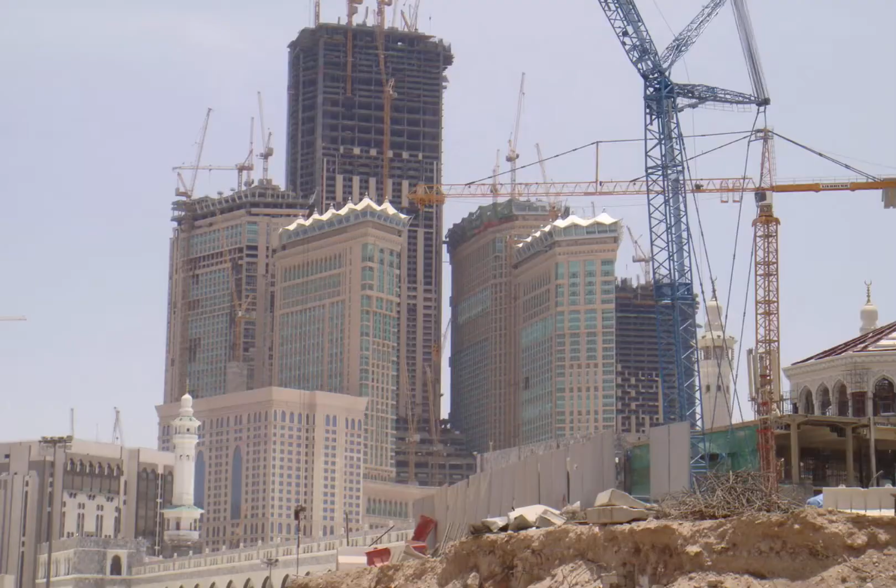Mecca is a place found in Saudi Arabia, known around the world for Muslims. In Mecca, there is Masjid Al-Haram, which is very sacred for Muslims around the world. The Masjid Al-Haram Mosque is also a major attraction for the more than 6 million pilgrims who visit Mecca each year. The Saudi Arabian government has implemented a mega project, the largest expansion project of the Masjid Al-Haram in Mecca.

One of the mega projects is the construction of the Abraj Al-Bait Clock Tower. The building is adjacent to the Kaaba in Masjid Al-Haram. The Abraj Al-Bait Clock Tower is the tallest building in the Middle East and Saudi Arabia, as well as the third tallest building in the world. It was developed at an estimated cost of $15 billion, making it one of the most expensive buildings in the world.

Abraj Al-Bait Tower is included among the 10 tallest tower buildings in the world. It surpasses the height of many towers worldwide and has been listed as the 10th tallest tower building globally. Abraj Al-Bait is the third tallest building in the world, having surpassed the height of Taipei 101, but it still cannot surpass the height of the Burj Khalifa Tower, which is the tallest building in the world.

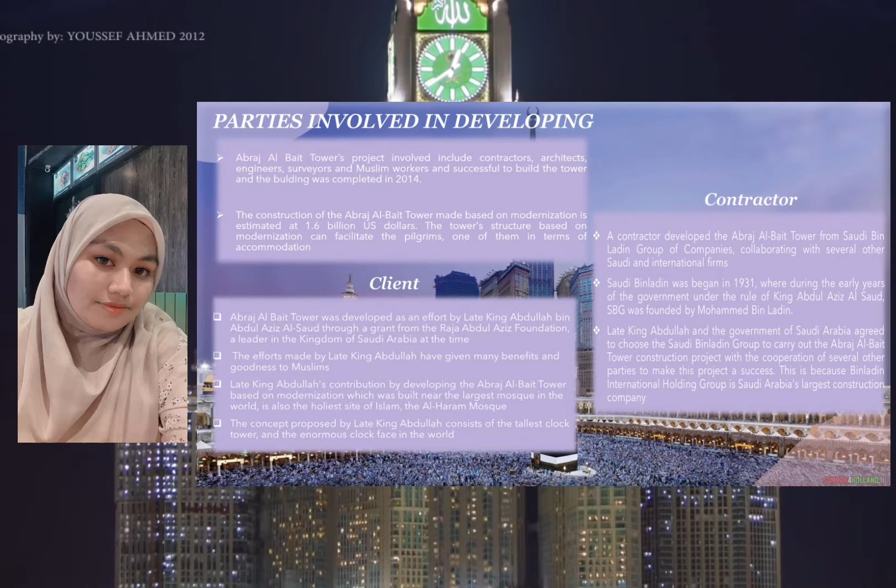Today I will talk about the parties involved in developing Abraj Al-Bait Tower. The project involved contractors, architects, engineers, surveyors and Muslim workers, who successfully built the tower. The building was completed in 2014.

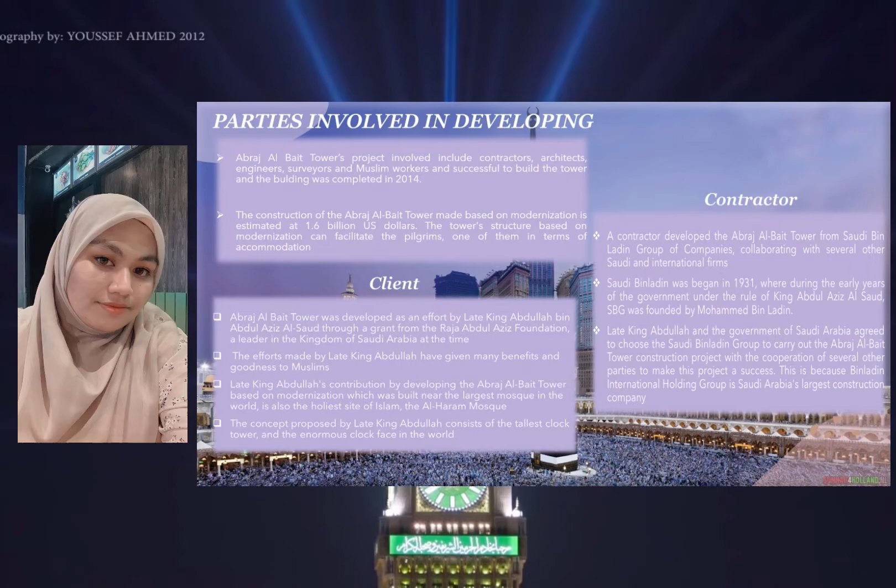The construction of the Abraj Al-Bait Tower, made based on modernization, is estimated at 1.6 billion US dollars. The tower's structure, based on modernization, can facilitate the pilgrims, one example being in terms of accommodation.

Firstly, the party involved in developing it is the client. Abraj Al-Bait Tower was developed as an effort by the late King Abdullah bin Abdul Aziz Al Saud through a grant from the Raja Abdul Aziz Foundation, a leader in the Kingdom of Saudi Arabia at the time. The effort made by King Abdullah has given many benefits and goodness to Muslims.

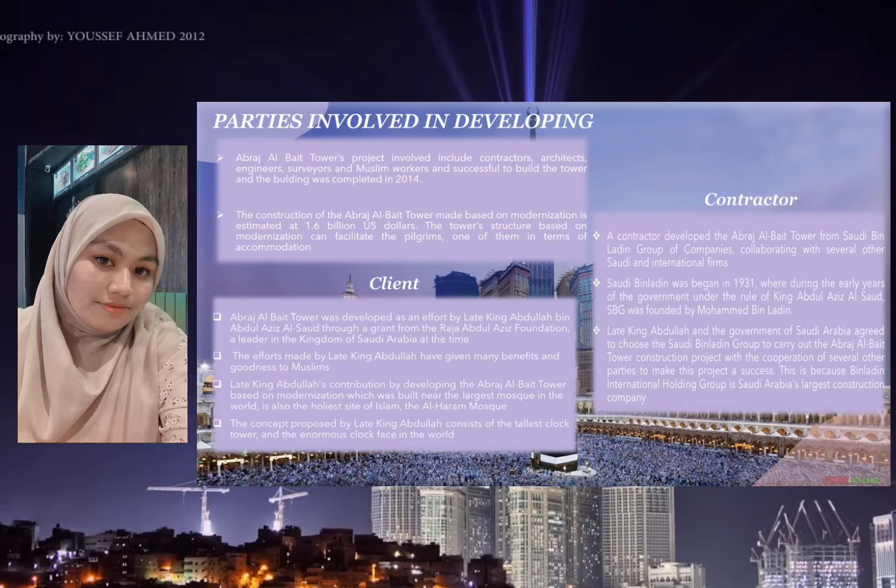The late King Abdullah's contribution by developing the Abraj Al-Bait Tower based on modernization, built near the largest mosque in the world, which is also the holy site of Islam, the Al-Haram Mosque. The concept proposed by the late King Abdullah consists of the tallest clock tower and the enormous clock face in the world.

Secondly, the contractor. The Abraj Al-Bait Tower was developed by the Saudi Bin Ladin Group of companies, collaborating with several other Saudi and international firms. Saudi Binladin Group began in 1931, during the early years of the government under the rule of King Abdul Aziz Al Saud, and was founded by Mohammed Bin Ladin.

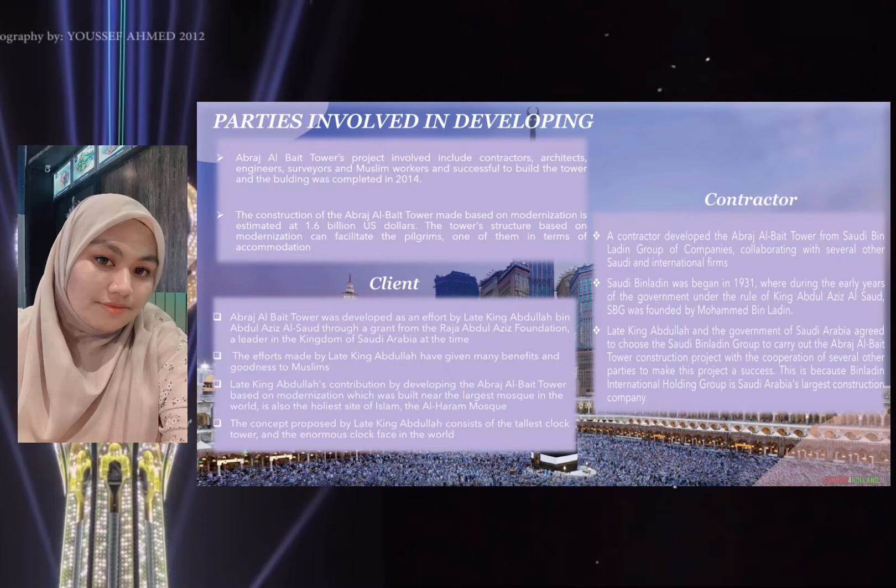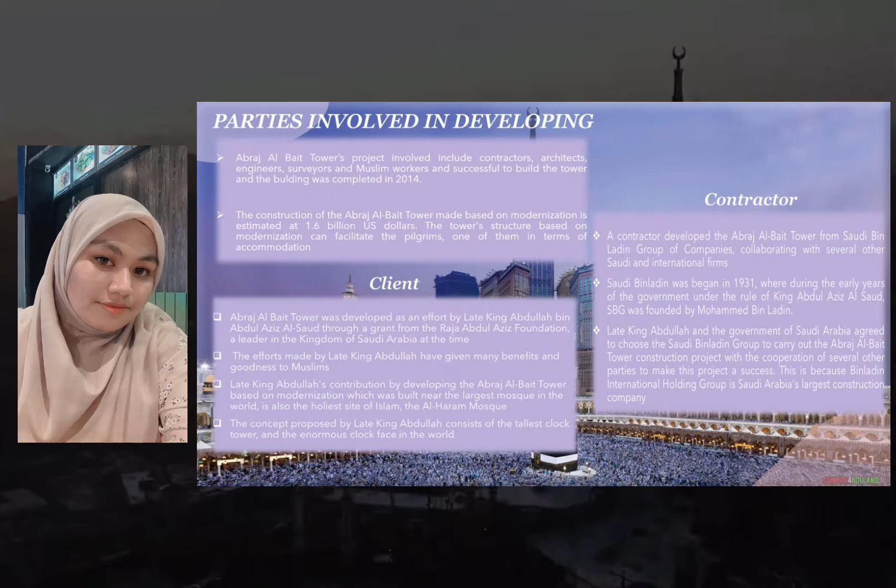The late King Abdullah and the government of Saudi Arabia agreed to choose the Saudi Binladin Group to carry out the Abraj Al-Bait Tower construction project, with the cooperation of several other parties to make this project a success. This is because Binladin International Holding Group is Saudi Arabia's largest construction company.

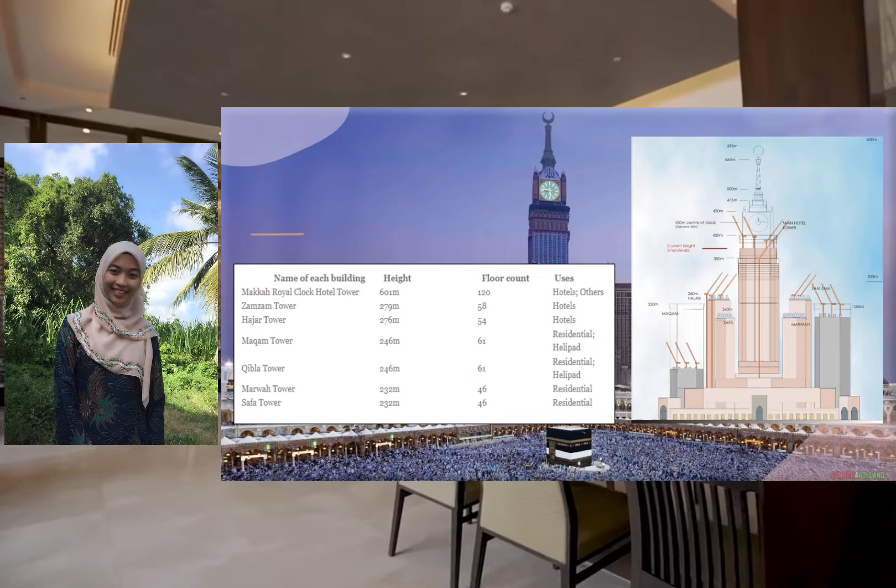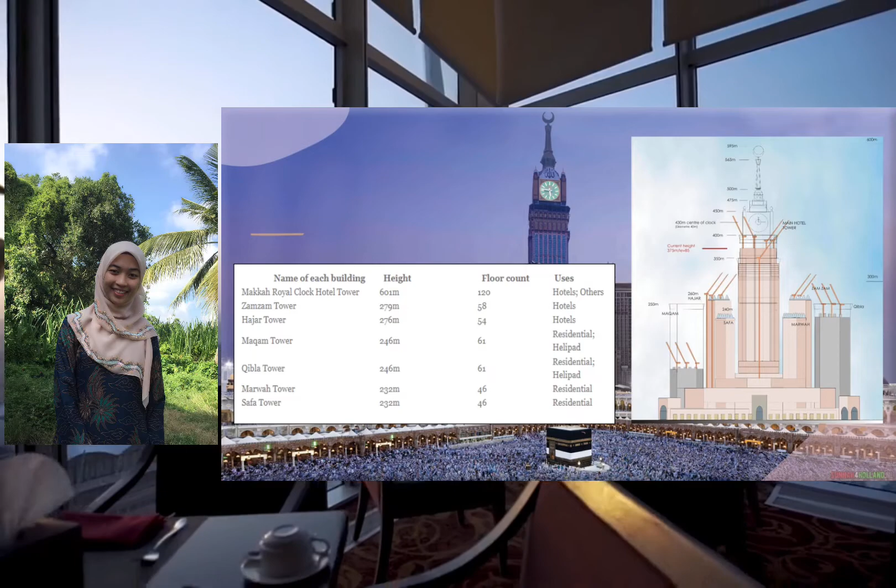Abraj Al-Bait Tower's location is also special, being just 50 meters away from Islam's holy site, the Kaabah. It is surrounded by Masjid Al-Haram, the largest mosque in the world. The 601-meter height of the Abraj Al-Bait clock tower structure makes it a unique building.

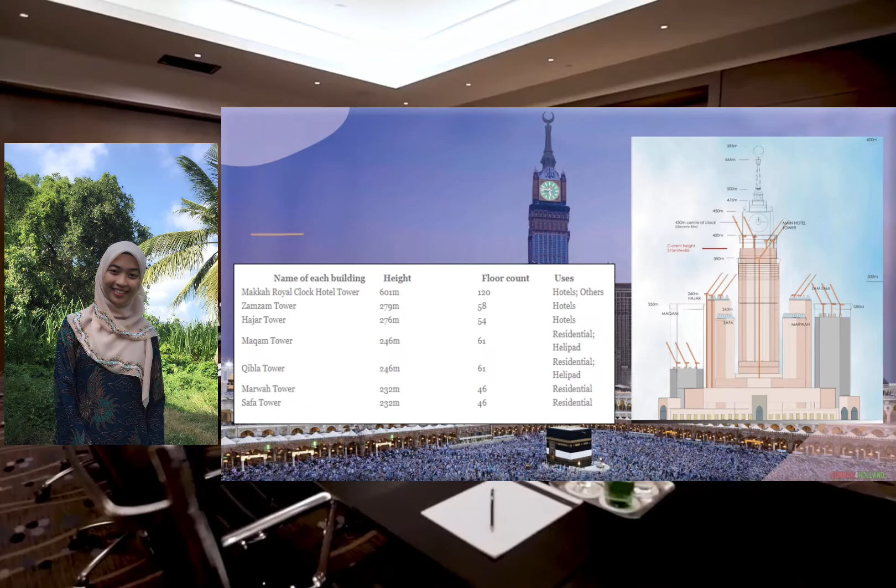It is the third tallest building in the world after the Burj Khalifa and the Shanghai Tower. The Mecca Clock Tower is the city's new landmark due to its unique location and substantial height.

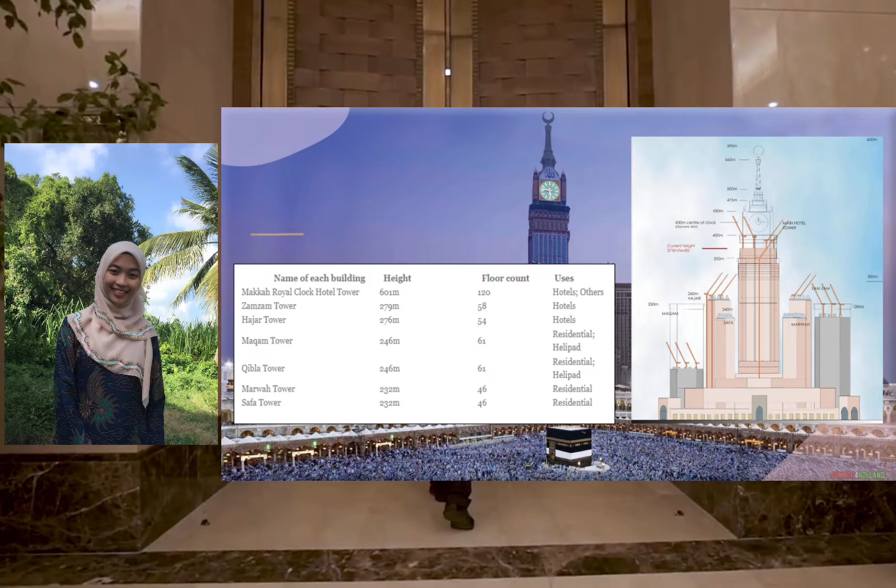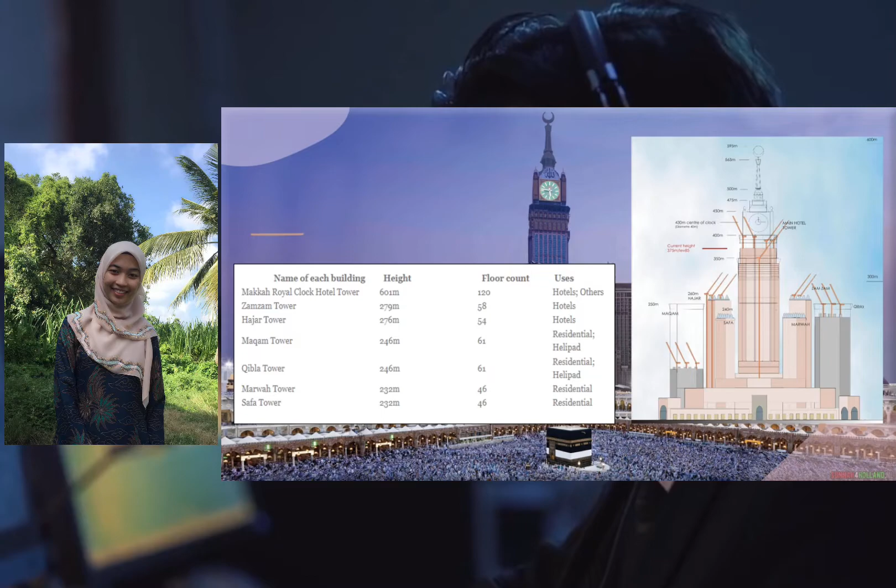The building complex in front of Masjid Al-Haram in Mecca consists of 7 buildings named Hajar, Zamzam, Maqam, Qibla, Marwah, Safa, and also Abraj Al-Bait. The Abraj Al-Bait complex has approximately 16 million square feet of floor space.

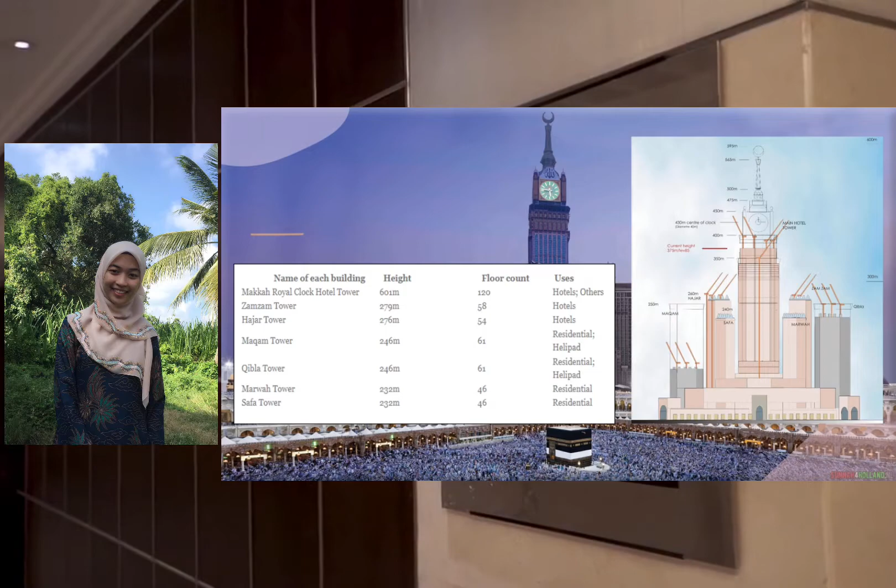The capacity of Abraj Al-Bait is 65,000 to 100,000 people. It was designed by Dar Al-Handasah, an architectural firm from Lebanon. The building complex is designed in a typical Islamic style.

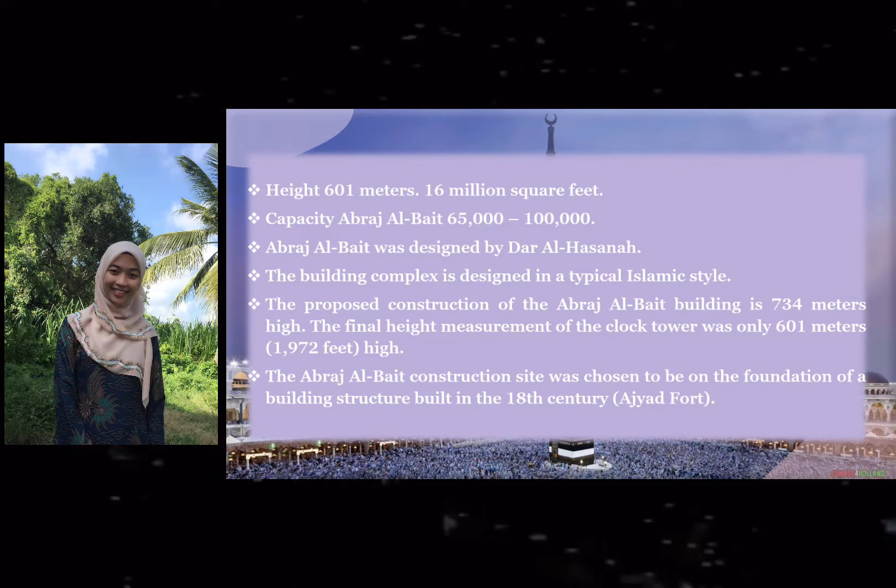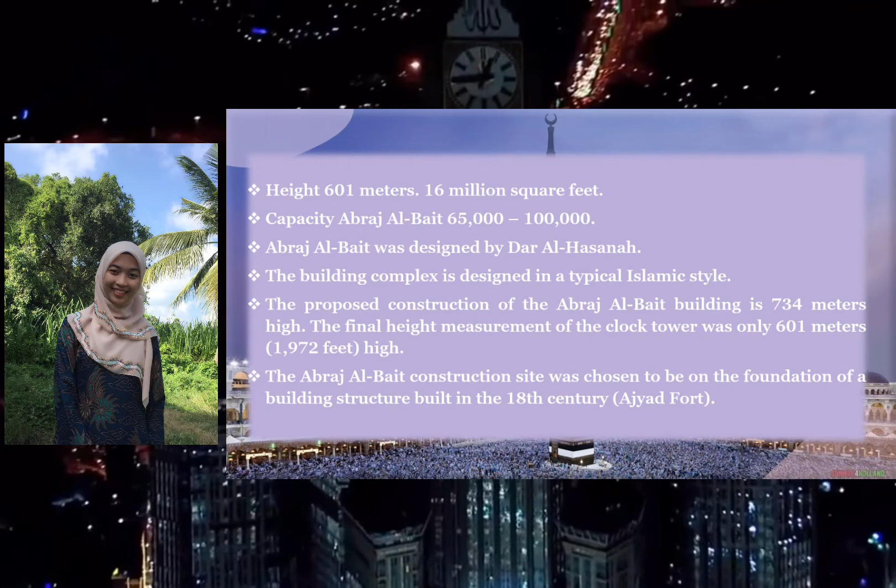Based on the initial construction proposal, the Abraj Al-Bait building was proposed to be 734 meters high. However, after re-inspection in the planning and implementation phase, the final measurement of the clock tower was only 601 meters, reduced by 133 meters from the initial proposal.

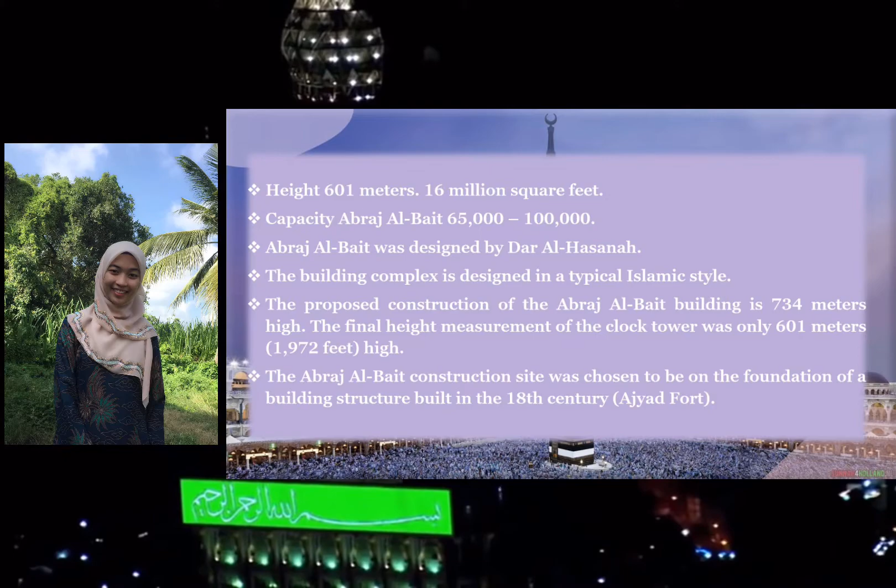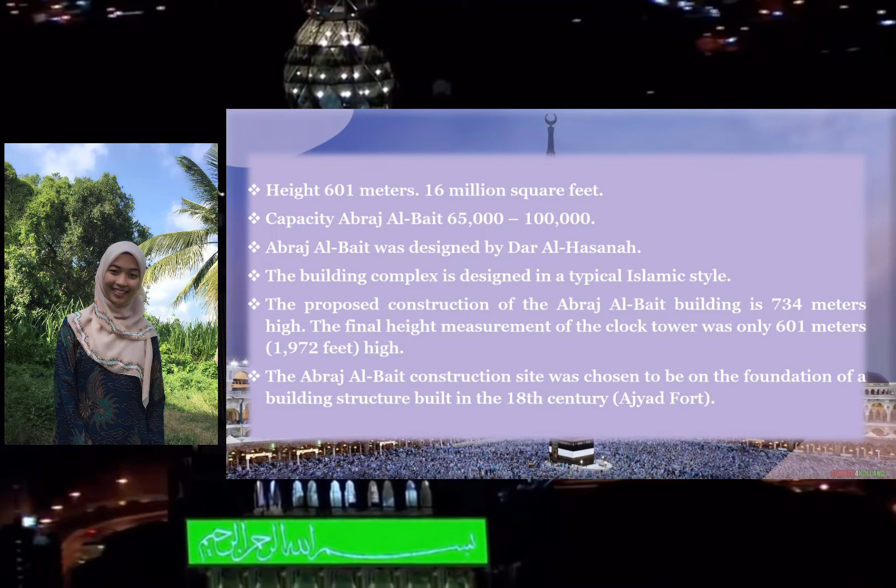In this early phase of construction, the Abraj Al-Bait construction site was chosen to be on the foundation of a building structure built in the 18th century. The location is known as Ajyad Fort, constructed during the time of the Ottoman Empire.

The construction of the clock tower project has received recognition as well as certain titles given by the whole world. The recognition obtained and the record held at this time is that the Abraj Al-Bait Tower is the tallest clock tower in the world, part of the holiest building complex and the largest mosque in the world, and many more. The tower also has its own uniqueness, such as having the largest floor structure in the world.

The recognition as well as the records obtained by Abraj Al-Bait Tower clearly show that the architecture developed mainly on behalf of the Saudi Arabian government, architects, and many other parties involved demonstrates excellent success in the history of world development.